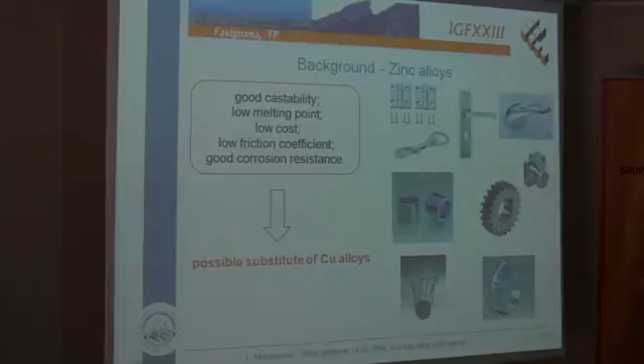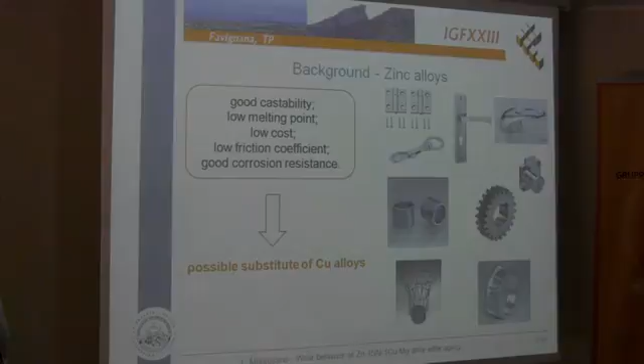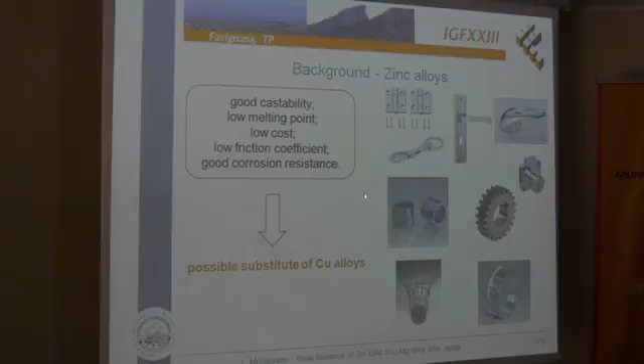Zinc alloys are materials characterized by good castability, a low melting point, and low cost. These characteristics make them suitable for realizing different components, from gadgets to handles. These materials also have a low friction coefficient, often lower than that of copper alloys in different fields. So in recent years, many parts like gears, locks, rims, and so on are realized with zinc alloys, mainly because of the low cost coupled with these properties.

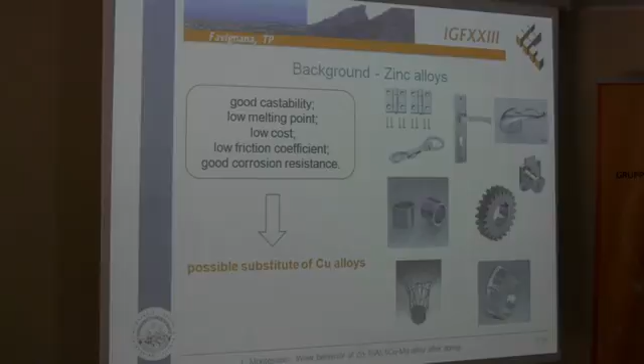One of the main problems of zinc alloy is aging, which can be defined as the decrease of the mechanical properties of the alloy over time. The material moves towards a more stable equilibrium state, and the properties decrease over time.

The process is well known on traditional zinc alloys like Zamac, and has been studied mainly on properties like hardness and UTS. The process is slow at room temperature, taking years — the material reaches a stable condition after 20 or 30 years. But the process is enhanced by temperature, and considering the melting temperature of zinc alloy, 100 degrees is often sufficient to reduce the aging time from years to hours or days.

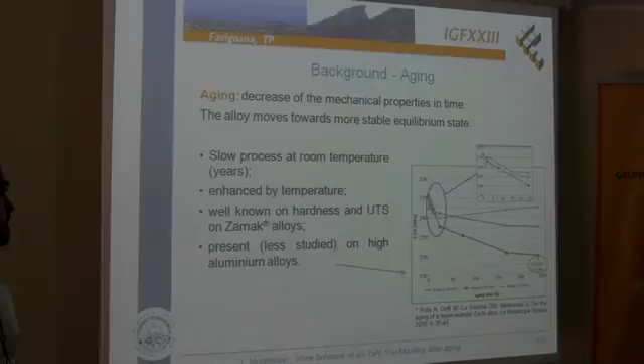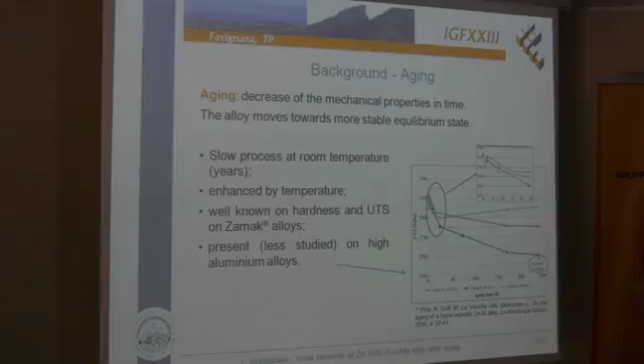The phenomenon is also present for high-aluminum zinc alloys, not just the traditional one, but it's less studied. In this picture, I show you one of the studies of the aging phenomenon of this zinc alloy.

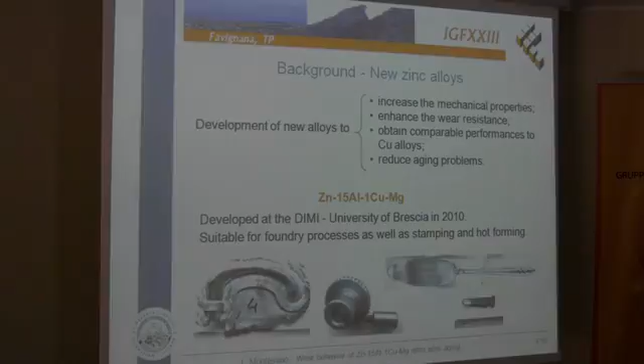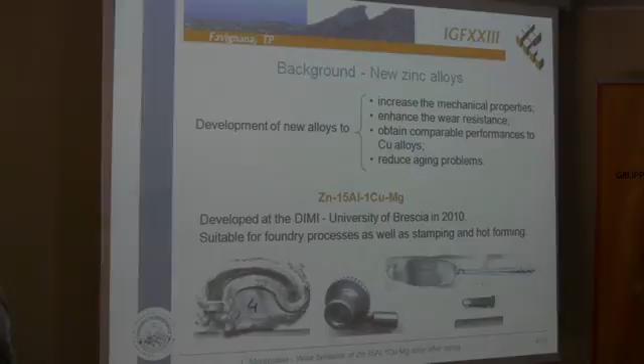For this reason, and to overcome the problems of zinc alloys, in recent years a new zinc alloy has been developed to increase the mechanical properties of the traditional one, to enhance wear resistance, and to reduce the aging problem, in order to create a material that can substitute the more expensive copper alloys.

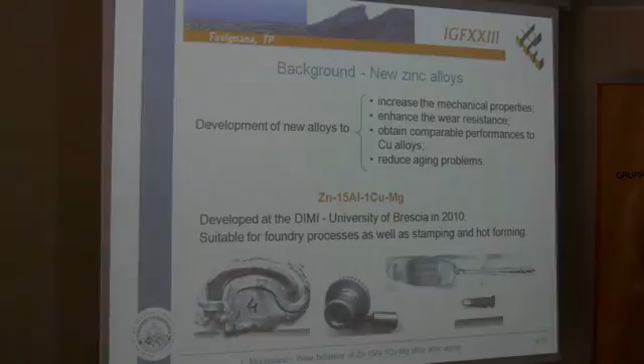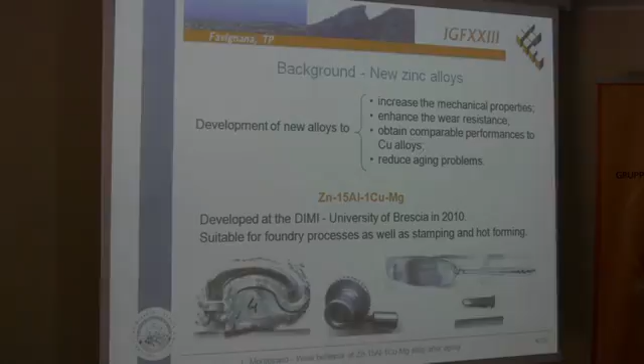The alloy we study is a zinc-15-aluminum-1-copper-magnesium alloy that was developed at the University of Brescia in 2010. We did some trial tests in the factory and in the laboratory, and we saw that the alloy can be suitable to realize components both by foundry processes and by stamping and hot forming processes.

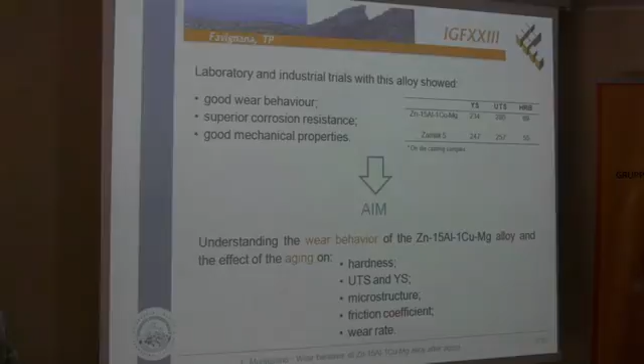This alloy is characterized by good wear behavior, good wear resistance, good corrosion resistance higher than the traditional alloys, and good mechanical properties, as shown in this table.

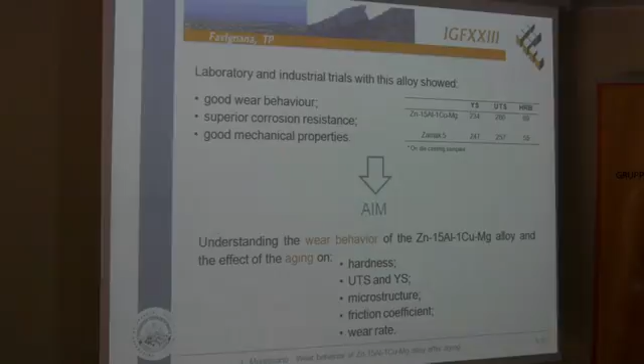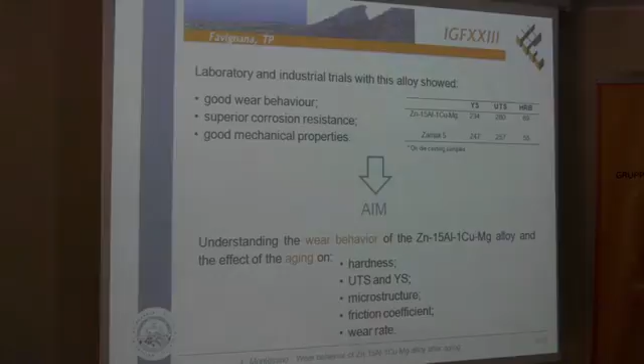So the aim of the work I'm presenting is to understand the wear behavior of this alloy, and in particular to study the effect that aging has, first of all, on the wear behavior, and also on the other properties of the alloy. To achieve this goal, we started with the production of samples via spin casting.

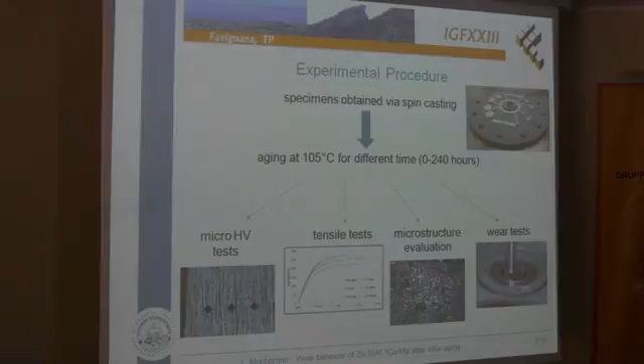We produced all the samples for the tests we did later. We aged all the samples at 105 degrees for different times, starting from 0 hours, the not-aged sample, up to 240 hours. The temperature of 105 degrees was chosen because it is a reference for traditional zinc alloys, since the properties that the material reaches after 1 year of natural aging can also be reached after 24 hours of aging at 105 degrees.

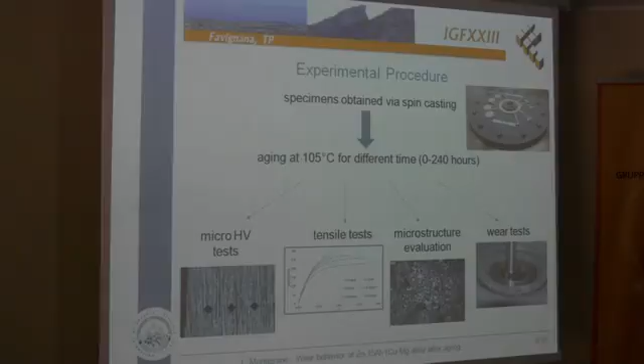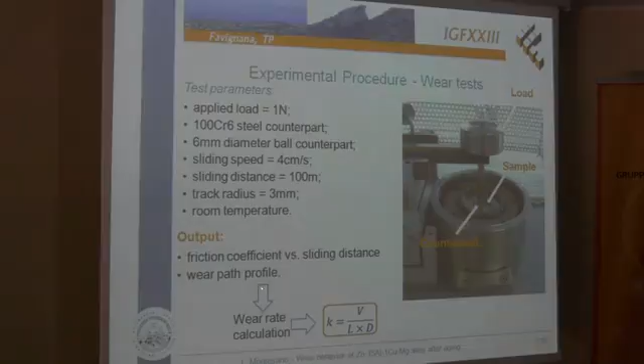We then did micro-hardness tests and tensile tests, evaluated the microstructure, and performed wear tests. For the wear test, we did pin-on-disc testing with the apparatus shown in the picture, choosing a very low applied load of 1 Newton, because this load is sufficient to significantly damage the material after the test. As output of this kind of test, we obtained the friction coefficient and the wear path profile, measured via stylus profilometer. This measurement allowed the wear rate calculation using this formula.

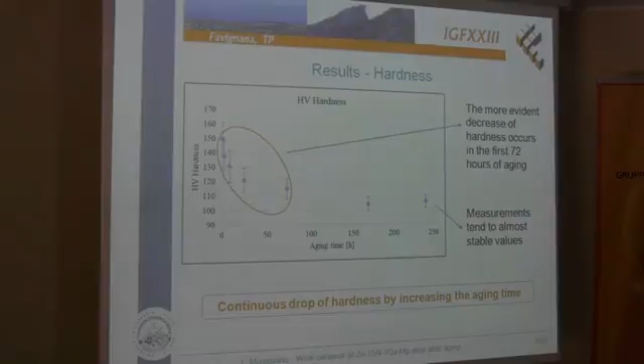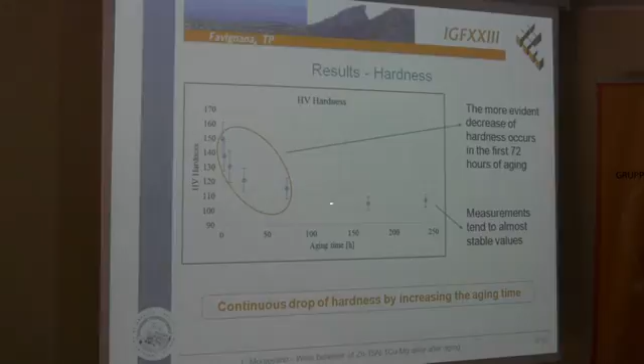Moving on to the results, as you can see in the graphs, the alloy is sensitive to aging, because the hardness decreases substantially during aging. In particular, in the first 72 hours we have the first and more persistent drop, and then the value seems to reach a stable value.

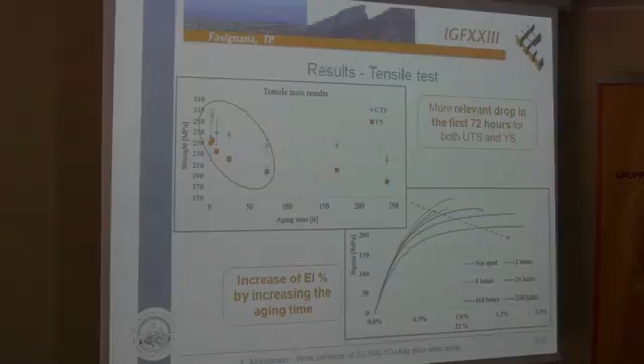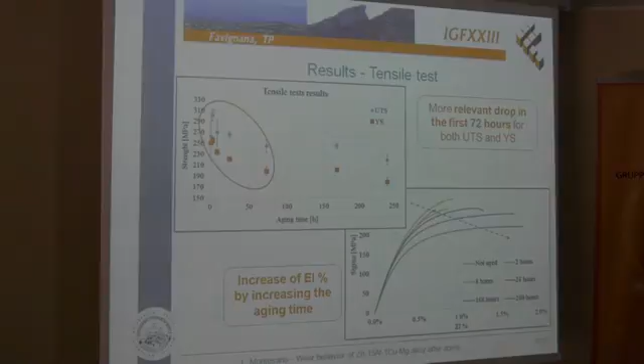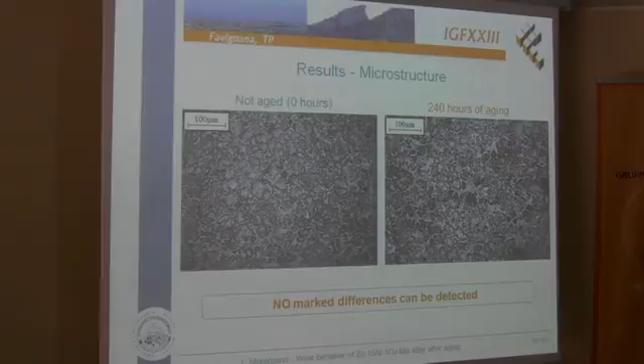To understand the cause of the reduction in mechanical properties, we studied the microstructure of the alloy. As you can see in the picture, we can see two different phases: the globules of the primary aluminum phase in gray, and in white the zinc rich phase.

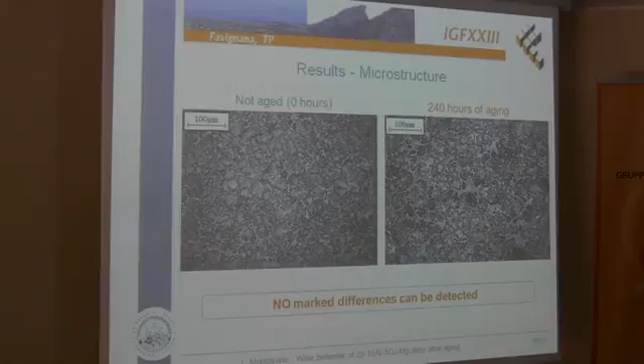After the aging, we did not point out any substantial modification, neither in the type of phases nor in the morphology or the amount of the different phases. So we move on to studying the fracture surface of the tensile test samples.

As you can see, the fracture surface is mainly brittle. But after the aging, we observe that the aluminum rich phase, indicated in both figures with spectrum 1, becomes more ductile, as the fracture shows the typical ductile surface with the presence of dimples. But only the aluminum rich phase shows this modification, as the zinc rich phase remains brittle.

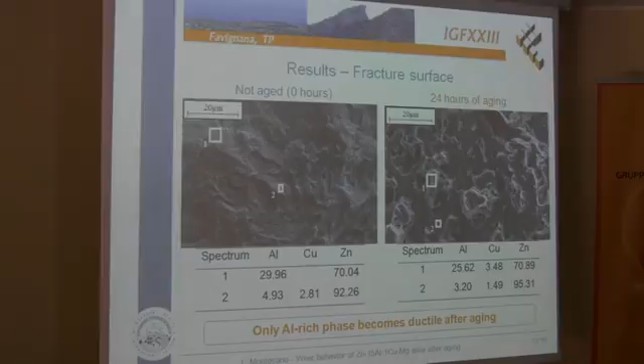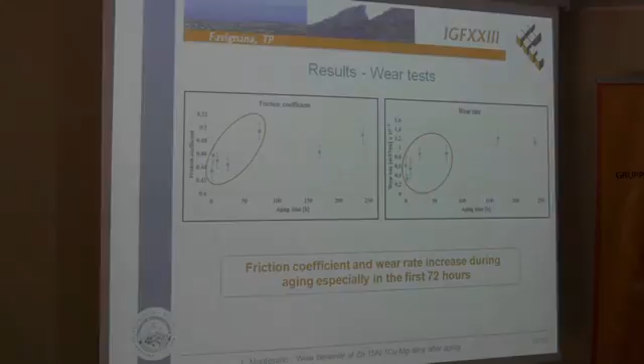The wear test shows a worsening of the material after aging, as the friction coefficient as well as the wear rate increase after aging. Also in this case, mainly in the first 72 hours of aging.

In order to understand also the wear test result, we studied the morphology of the wear tracks, and we observed that the morphology of the tracks shows a couple of phenomena of oxidation and abrasive wear, as scratches aligned in the sliding direction are present, as well as oxidizing areas inside the tracks.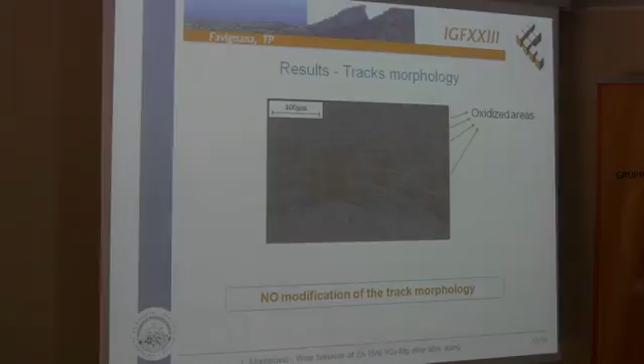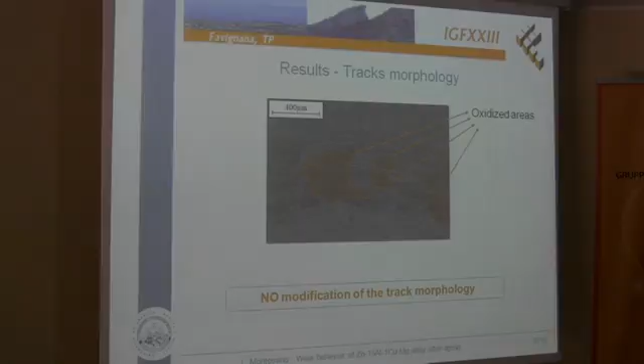The morphology of the track doesn't change by changing the aging time, so the decrease of the behavior during wear is mainly related probably to the decrease of the hardness of the material, as it is well known that decreasing the hardness of the material increases the abrasive wear.

So, concluding, we observe that the UTS, the yield strength, and the hardness of the material decrease by increasing the aging time, showing that also this material, as well as the traditional alloys, changes its properties during aging.

The cause of this behavior is not related to the microstructure, as the microstructure doesn't change after aging. But we observe that the material becomes more ductile, or in particular the aluminum rich phase becomes more ductile after aging, justifying the increase of elongation and also the decrease of UTS.

The wear behavior is worsened by the aging, as the friction coefficient increases and the wear rate increases too. This behavior is related probably to the decrease of the mechanical properties, as the morphology of the wear track doesn't change with increasing aging time.

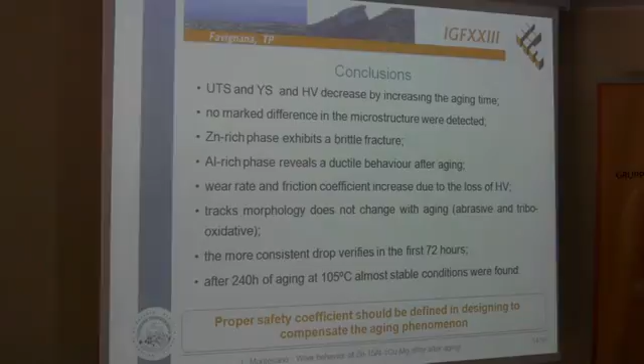We also observe that the first and more consistent drop of the mechanical properties is, of course, in the first 72 hours. And then the material reaches a sort of stable condition, confirmed also by the tests performed at 240 hours.

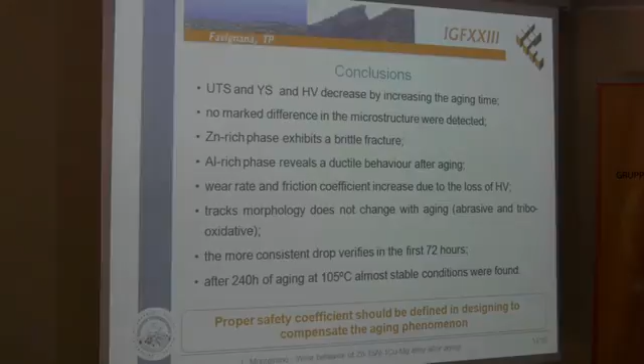So, as an indication for designing parts with this alloy, it can be really useful to define a proper safety coefficient in order to compensate for the effect that aging has on the mechanical properties. Thank you for your attention.